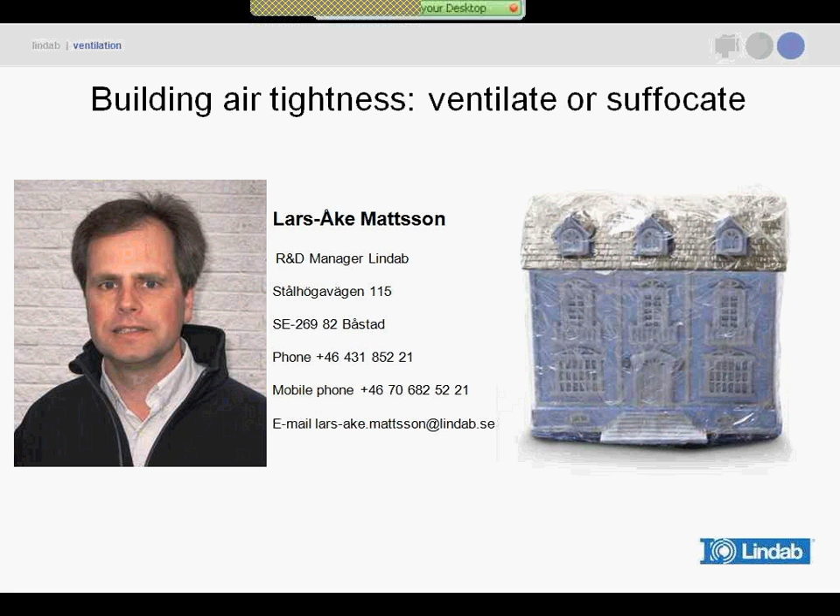My name is Lars Ake Mattsson, and I work at a company called Lindab. Lindab is an old company, 50 years old this year, and we work mainly with steel.

Our company is divided into different parts. One of them is ventilation, and that part has two areas. It's the air duct system, which is my major area, and also the comfort area. The comfort area is about how to blow air into the room. The other part is building components and building systems. Building components is how to produce all the parts for a metal house, so our customers can make a really good building.

We also have this building system, a complete building made from Lindab that is maybe erected by someone else. But anyhow, the full solution is made by Lindab, so that is a building solution. I'm quite proud to be here, and I thank you all for bringing all this knowledge.

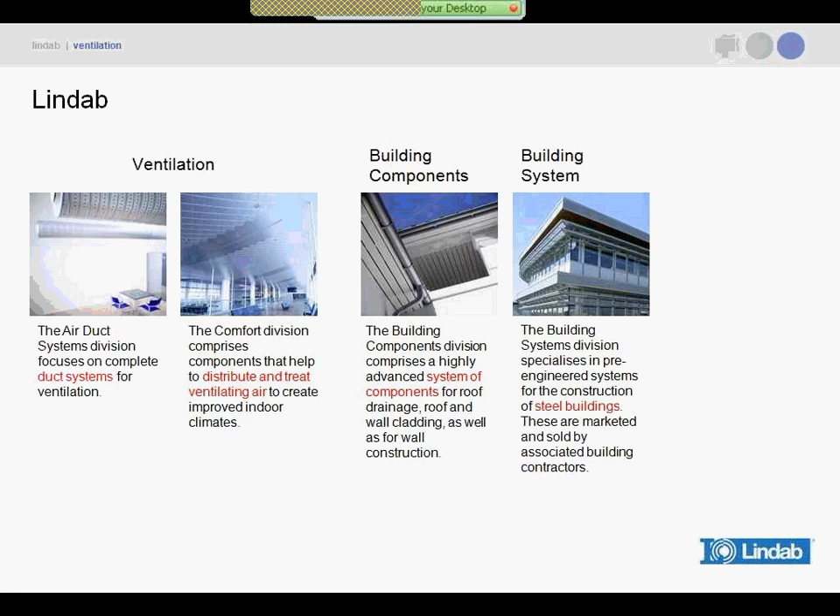I think Lindab is very tied to this topic we are talking about, because we also have this build tight, ventilate right. We have the buildings, we have the ventilation, and we have driving forces upon us that are very similar, and we have put them together here. We have the Kyoto protocol, the Energy Performance of Buildings Directive. We work a lot with national laws and building directives, and of course we have our own way of living and how to really create a good environment to bring this to the market.

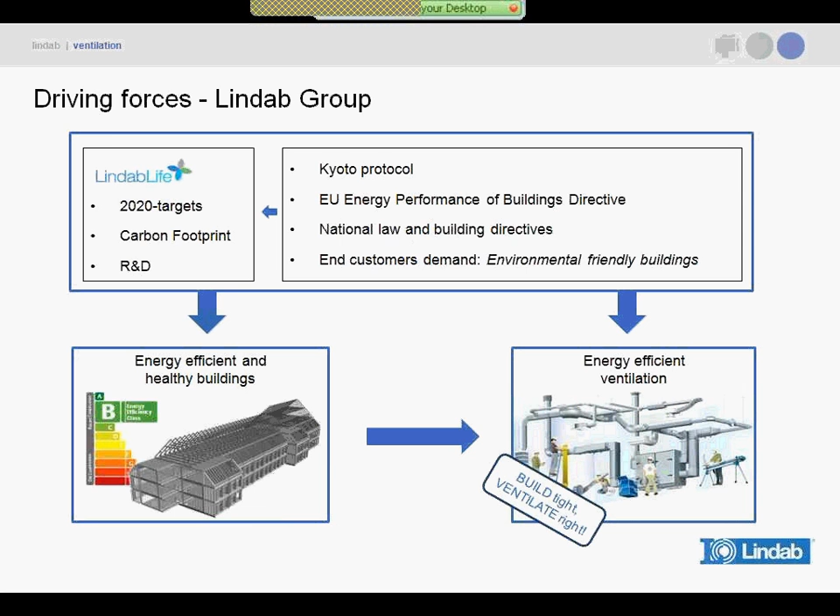As I said before, we have a lot of solutions and a lot of products, and they are quite good. The designer has the solution, we have the solution, our competitors maybe have the solution. But the problem is to actually communicate through the whole organization and make it happen.

So we have created IT solutions, and that is a quite powerful tool to really see that it's working from the designer, the purchaser, to the erecting company. All of them have the same information, the correct drawings, the same way of doing it. I think this is the real problem within our business, that we don't communicate between the people, and the IT solutions is one of the major parts.

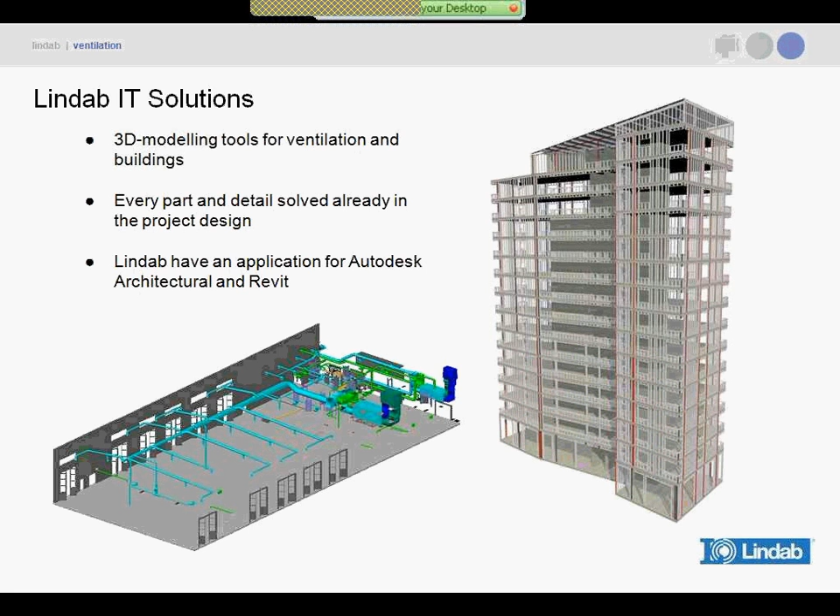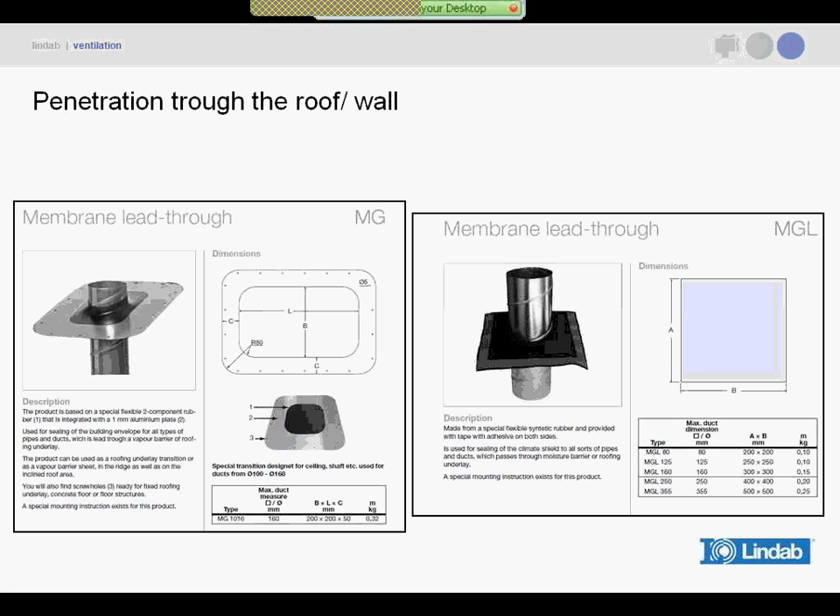Here is a little part that is very unknown. Almost everybody asks, how long have you had that part? And we have had it for 10 years. It's how to penetrate a roof or a wall, using this very simple rubber manchet to put over the duct. Nobody has seen it, even though we have promoted it for years.

We also have, for the building components, a lot of instructions, and I think these instructions are the most important things that we have. We must promote them better so our customers read them and understand them, because the solutions are there, the steel beams are there, the insulation is there, the vapor barrier is there, only how to put them together - that is a big problem.

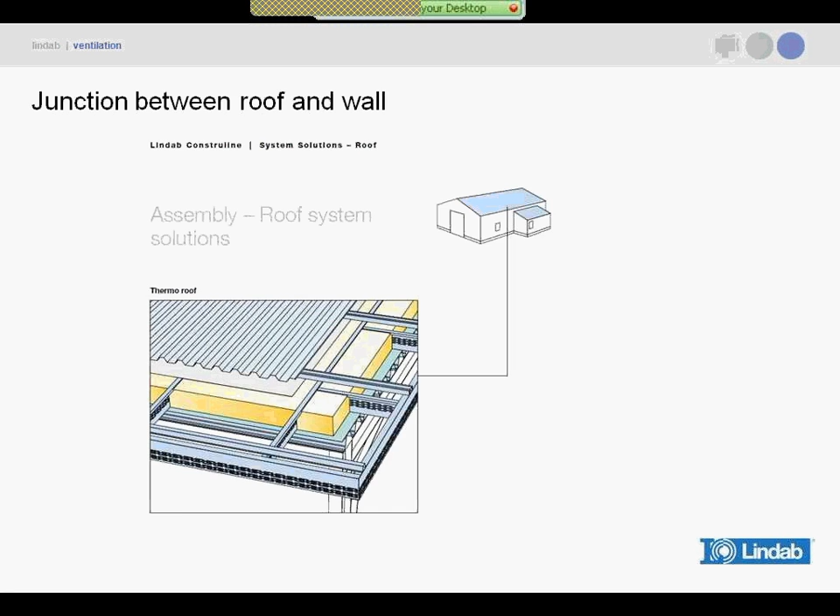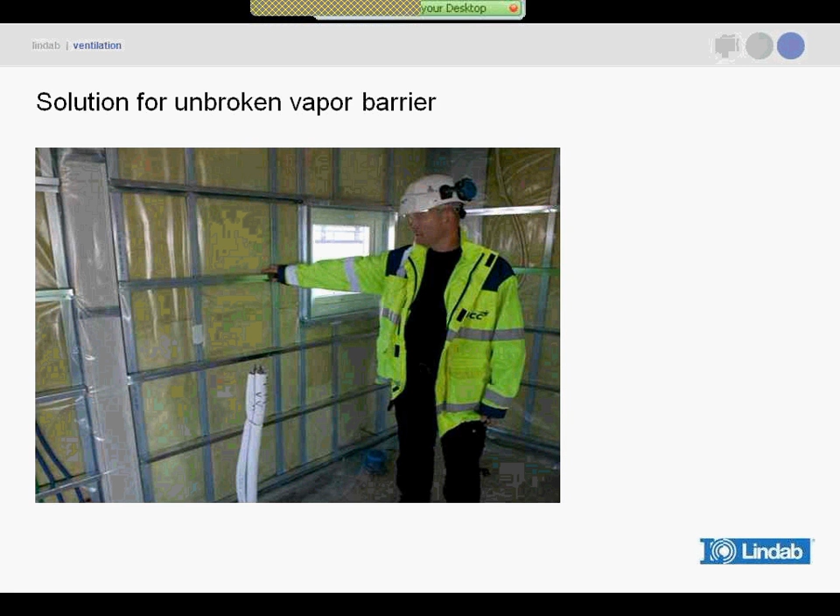Same goes for the junction between roof and wall - the solution for an unbroken vapor barrier. All of the things are there already, and here come the instructions. They are a whole book looking like this, very easy to understand. But how many of you have opened, when you buy a television, how many open the manual? So that is a great opportunity for us to bring it out and educate people.

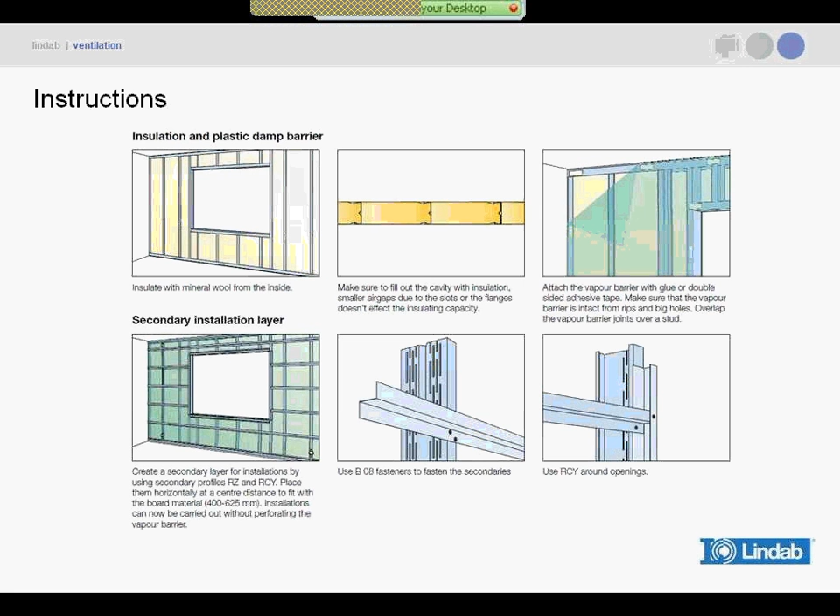If we go to the ventilation system, it's a very complicated task, and we have all the solutions, and the designer has all the solutions. They have our program, so they can actually test a real system for flow, pressure drop, sound - no, not fire, but anyhow - they can test most of the parts, which is very interesting when we're talking about energy.

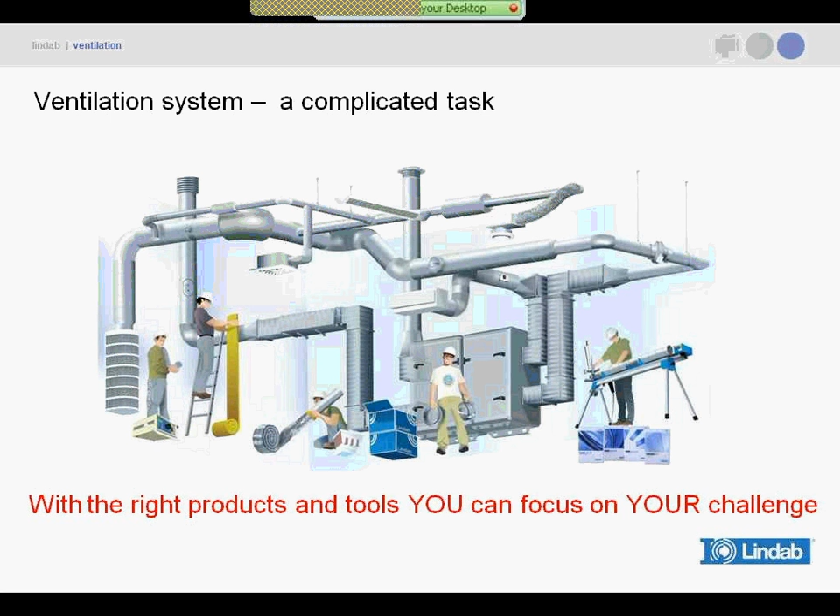This is the width of our solution. You can't see what it is, but it's a lot of things - diffusers, how to erect them and how to hang them, bends and T-pieces, chilled beams, how to chill a building. All of them we can have in our program and know the technical data around it.

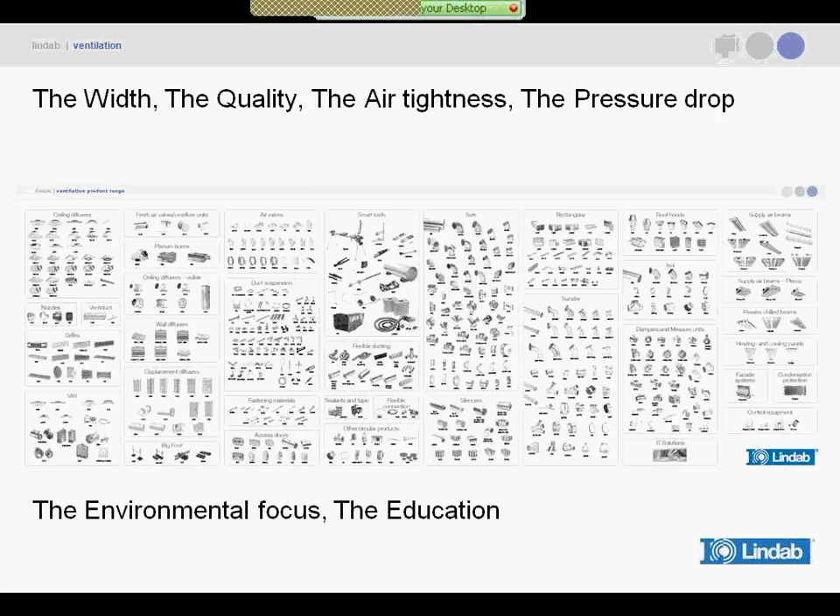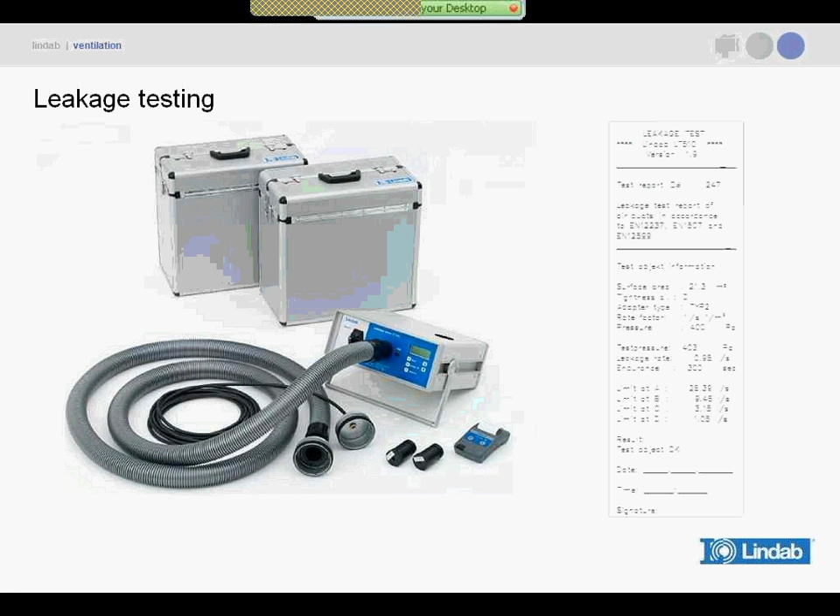This is also very special, and you saw that yesterday down in the lobby. It's an air tightness tester, a very simple thing for the installer to test if it's airtight or not, and that makes him a little bit more powerful. It also brings some new things to the installing people, and I believe this machine has made a difference because they feel they have more technical things to do, and they rise a little bit in their whole attitude towards being better.

So this is actually what I've talked about the whole time. We have a gap between the knowledge, the designer, and what actually will happen out in the field. We believe that education is a very central thing - good solutions, of course, but we need to talk about our good solutions and inform about how to use them. Good drawings too, because I think the drawings today are not perfect. The designer knows exactly how to do it, but then it's presented in a 2D way, and it's not communicating very well to those who are going to erect it.

Then the most important part, communication, and that's the most difficult part as well - how to communicate with our customers. Precise offers, that is also very important, and as we heard yesterday from the United States, they set demands also that if it's not airtight, you have to redo it. You have to have precise offers, exact things that you are talking about, so you actually know what to do and what's expected of you. Because otherwise, we won't have airtight solutions, and we won't reach our target. Okay, thank you.